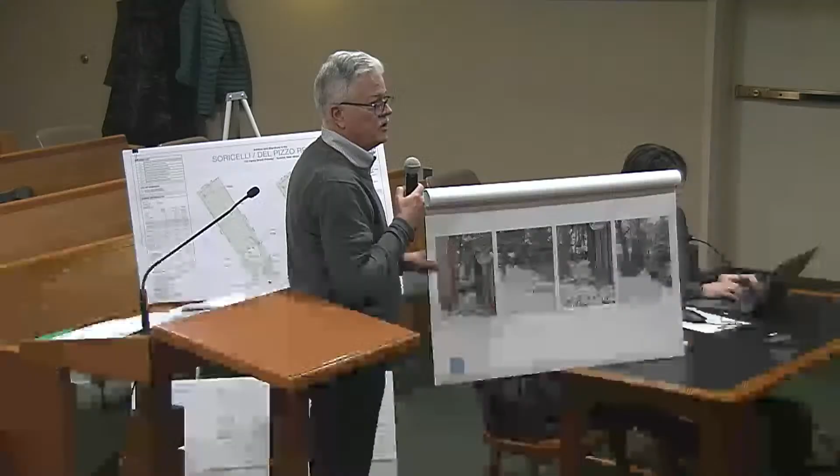There isn't a lot, so it's in that photo on the right. The landscaping between the 2 properties is a couple trees and a couple shrubs. There's more landscaping around the air conditioners than there is between the 2 properties.

I think those pictures were taken when and by whom? Nancy took these. I took them yesterday, and they fairly represent what you're attempting to show. Yes.

We had filed a photograph which shows the boxwoods and also a holly that fairly screen it from the road and from their left neighbor.

Mr. Uko, I thought what she was trying to say was, if you have screening within 10 feet of the unit, then it's screened. I think that's what it says. Yeah, I think she was asking about the nature of the screening, but also maybe her point, wondering whose screening some of that was, could the neighbor remove it.

But really, in reality, those two trees are quite tall and the leaves are high, and they're not screening. Yeah, I wouldn't call them screening. They're mature trees, but I think the intent of screening the unit has been accomplished. Okay, I don't know what else we could do.

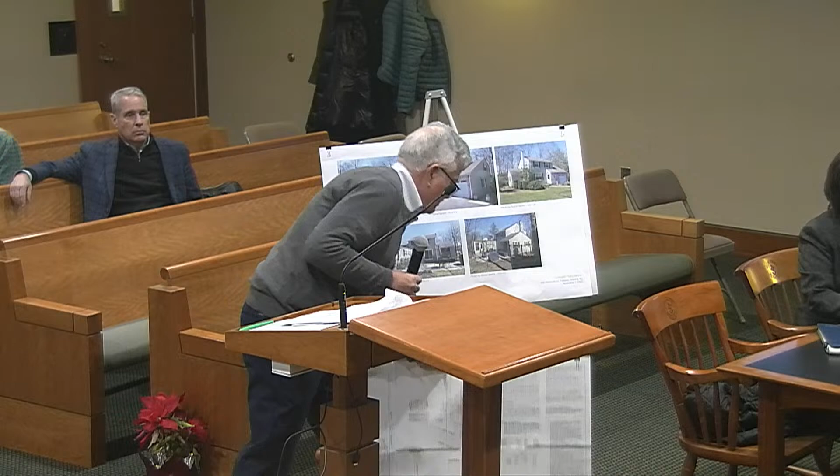November 15, 23. I think Christa's point was that the version we have in front of us tonight, she couldn't find a difference between what we have tonight and the first one she saw, and she was wondering what the revision was. I think that's what her question is. Okay, so it was the labeling. They requested the addition revision, so we made it. My experts are happy on that.

What else? Before we go on, can I just ask a quick question? This goes to what you were just talking about, the revision. Looking at the grading plan in front of me, the right side of the garage where it says proposed addition, should that be hatched in? No, if you're looking at the proposed conditions, it has a crosshatch on it and words next to it. Okay, because there's also an arrow that says proposed addition to like a rectangular box. Is that the addition for the garage? That is correct.

Okay, Marie, let me go to you for your... Can I ask Mr. Kelly? All right, I'll stick with this one for now. I'll just stay here.

Could you talk about that chain link fence in the backyard? It appears that it's going onto another property. I'm going to let Nancy talk about it, but yes, I asked Nancy to take a photo of that. I took pictures of that one too. So we've had a chain link fence for about 20 years. Didn't know it was across the property line until you referenced it. I took a walk out there because I don't recall that ever being an issue. I do know that when we put the fence up, we told the guys putting it up we wanted to make sure our dogs can't get out. So what I think happened, because I took a walk back there, there's a big tree, and then there's a root that goes from that tree, above the ground, to the fence. I think they just followed the edge of the root instead of going on the root. Yeah, so that's what I think happened. I think they went beyond the tree and the root, and that's why the fence encroaches on the neighbor's property.

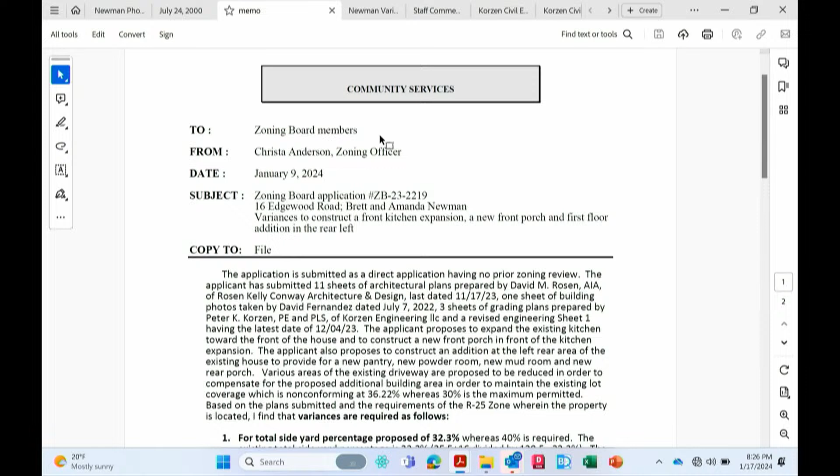Christa Anderson has all of the same things with some interesting history pieces, and she mentioned some other things, particularly lot coverage about circular drives. This property has a circular drive where the width should be 12 feet. We're pulling some of that back, adjusting some of the curbs, and reducing some of that paving area. Although the existing circular drive was presumably installed at the time the house was constructed, the applicant should be encouraged to reduce the width, especially in the area where the existing landscape island is proposed to be removed. And that's what we're doing - we removed that landscape island, since there was so much paving that they just put a circle with some plants there. We've narrowed the driveway and eliminated that.

On building coverage, she indicates that 3.8% is in the garage, and for floor area ratio, 3.75% is in the garage. There are some other notes going back to a resolution from 1999 talking about the use of the carriage house or garage - it is not an apartment. There is a bathroom and some rooms there, but it's not for overnight accommodation. She also mentions at the back of the garage there's an air conditioner for that building, and that it does not meet current requirements.

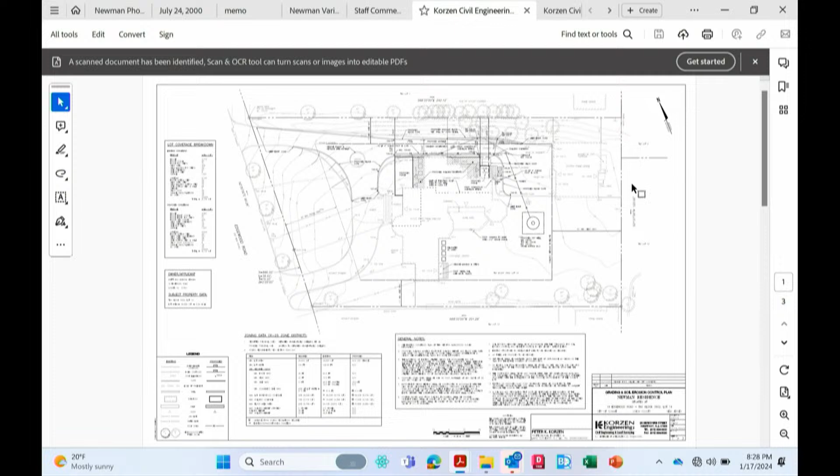This is a hard to see drawing. You want to take a break? I'm going to go get it. Thanks, Todd, we'll take a 2-minute recess. Sorry, George, we'll step on your toes. I don't. We try to stay as informal as I can.

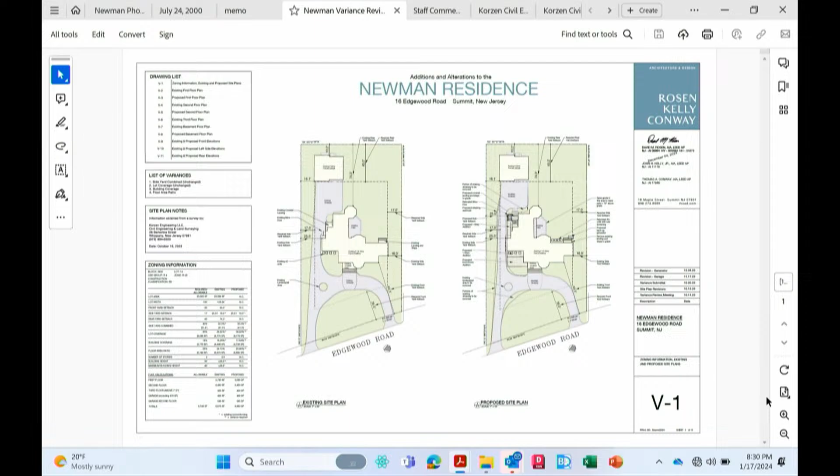Okay, hopefully I'm better with that. Anyway, in the back of the garage there's a pad with an air conditioner. It's closer to the property line than air conditioners are supposed to be. So going back to Christa's comments, that's pretty much all of it. She says that we can acknowledge that as part of this. By acknowledging that, would you like us to add a variance for the air conditioning location? I think that's totally up to you, how you want to handle that administratively. I think we should - we certainly agree if that's what you'd like to do.

On V1, same as what you have. It just shows the area with a hatch here, which is the porch, the area here, which is the extension of the kitchen, and then where the existing house has sort of a sawtooth wall at the back. That gets straightened out, and that's where the mudroom is.

There were other staff comments, in particular the HPC endorses the proposed changes. The new addition is appropriate size, scale, and all materials will match - this is an appropriate addition for the North Side Historic District, no objections. John Linson mentions - I'm not sure where his is - but he said there could be more screening on the left side of the property, I guess so that people in the Fortnightly Club parking lot have a nicer view, but that's of course fine with us.

There was a question among the engineering comments about the height of the curb. We're just sort of straightening out a portion of the driveway, and in doing so we're doing a slightly more substantial curb. It is only 7 inches high - I think that was your question. Yeah, it's not really a wall, but it's referred to on the drawing as that. Sorry.

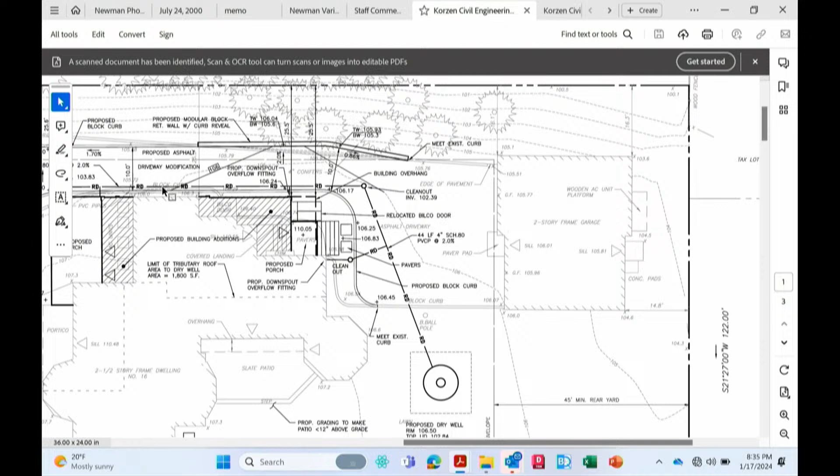What we wanted to do is take the areas—this is the driveway going back to the carriage house, this is the left side of the house. The Fortnightly is up at the top of the screen here. You can see by these contour lines that the runoff would go that way. So we took all the roof water from the left side of the house and directed it in a pipe back to the dry well. The purpose is to make sure that the more exposed side of the house, the area where it would naturally run off, is the part that's being contained.

Does that answer your question? Yes. Okay, Marie, as long as we're on you, why don't you pick up the rest, anything else you have? I do, yeah—I think he's going to talk about the next one. I wanted to ask him something about that.

So I've looked over the calculations for the dry wells. I don't take any issue with it. That's fine. He's going to put a locking cover on top, which makes it good for inspections and regular maintenance. I think those are all adequate.

So item 13, there is a slate patio in the back of the house. Let me see if I can get a better drawing showing that. So this, in gray, is that patio.

I think that when it was built—and this addresses one of Christa's comments about why some numbers may be different from 25 years ago to today—I don't know the specifics, but this patio's threshold is 12 inches, and the patio may be 13 inches above the ground. I think the ground may have just subsided a bit, gotten more compact. We didn't change it.

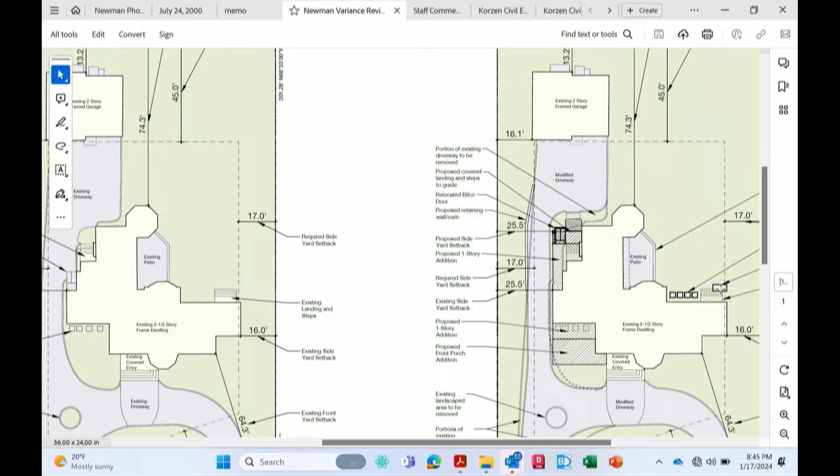I have no idea when the air conditioning went in there. It's long before Brett and Amanda bought this property. It's supposed to be right next to the building that it's serving, and the garage is supposed to be back there. But the garage is non-conforming in a number of ways. We're not doing anything with this.

Is that screened, though? I know there's a fence around part of the property - do the neighbors see that air conditioning? There was talk about just granting a variance for that, sort of grandfathering it in, but all of the questions that apply to location for any other air conditioning unit should apply to that one.

Is it screened? Does it impact the neighbors? That area is screened, the border has substantial landscaping, but we're also happy to add more if needed. I'm not sure there's room for more, because there are mature trees that run along there already - but I can barely see our neighbors now with the leaves gone on the trees.

So can that be a condition? Yes, we can make that a condition to landscape and make sure that's agreeable. We'd rather not change the location of it, so it'd be good to document that as an existing condition that will continue. But any landscaping required around that, we'll be glad to have as a condition of approval.

And speaking of conditions, I have a question for our attorney. We have the resolution from 1998 that clearly says the carriage house shall not be used for residence. We've heard the applicant, or the architect, saying we're not going to use it as a residence. Should we add that as a condition again now? Do we need to do that just to restate it, put it on the record?

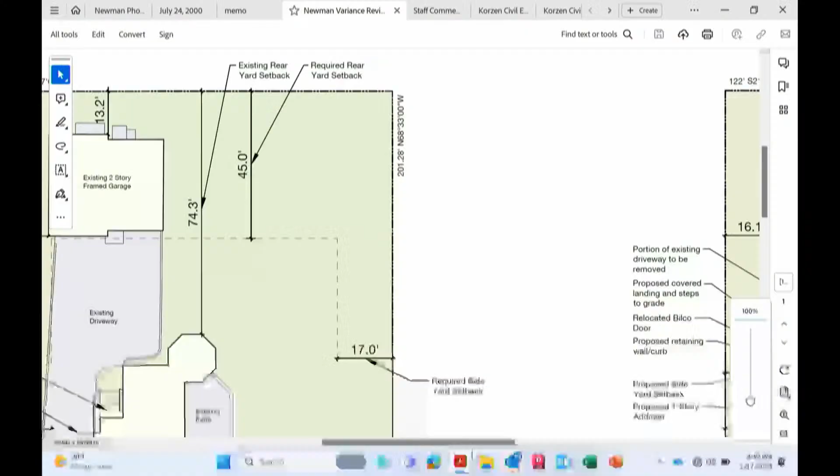I think Krista had mentioned something about either a permit for a generator having been granted or something. It's back here in the back right. And it's positioned there with the appropriate distance between the generator and the air conditioning units and the generator and the house, and it's conforming with regard to that side yard.

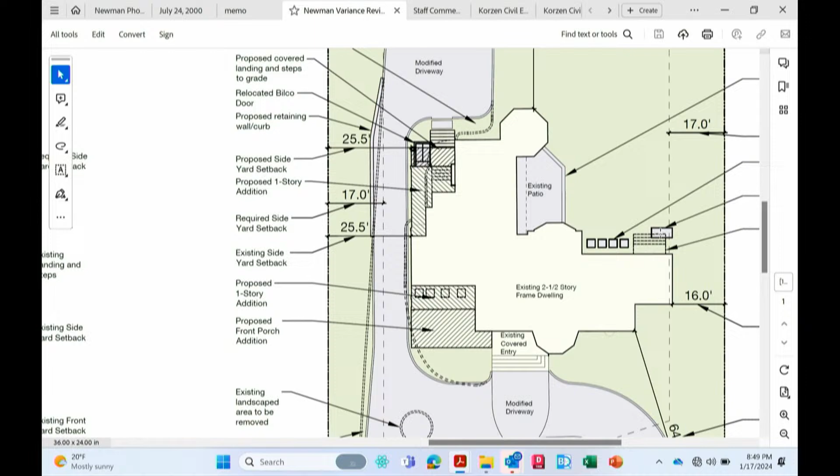What page is that on the plan? This should be V1, but there was a revision that was done, and we submitted that.

Sorry, give me a second here. So the version you may have was November 17, and this one is dated December 4th. Yeah, that's why I couldn't find the older version.

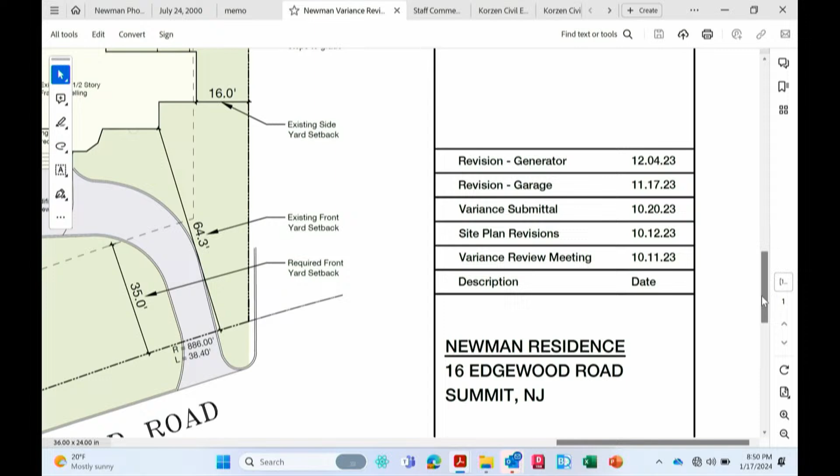And that's all conforming and everything? There were stairs there? The stairs are gone, they will be removed. Okay, I see that now. And the door that's there will be removed. Okay.

More questions from the board? Okay, at this point, I will open it to the public. Are there any members of the public here that wish to ask a question of the architect?

Seeing none. Last chance for the board. Any other comments that you would like to make at this point?

I think we're good. We just want to thank you for the time. As said earlier, we're just trying to make this a home that our family can continue to enjoy for years to come. Our children are still young, so.

Okay, then I will one more time open it up to the public, this time for any comments, pro or negative, whatever comments you wish to make on this application. Seeing none, we will move to executive session after conditions and vote totals.

So the vote total for this application is 5 votes as a D4 variance. The conditions are as follows: 1, compliance with the conditions enumerated in the board engineer's memorandum. 2, construction of a stormwater management dry well system sufficient to capture 1,800 square feet of roof runoff.

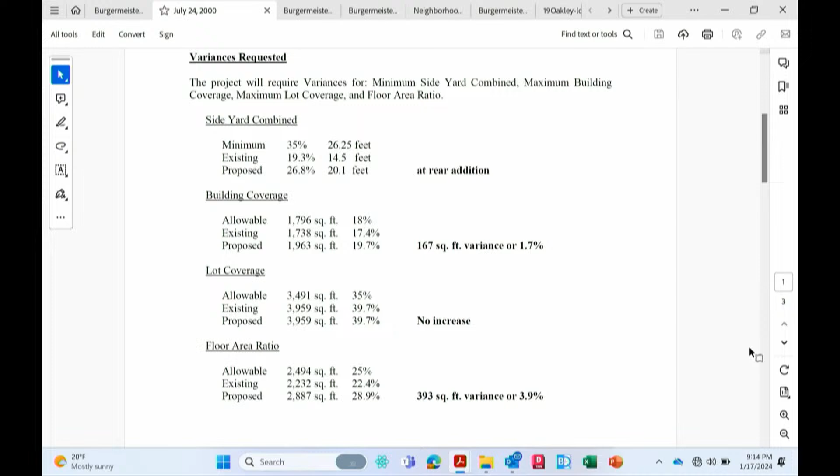Looking at the project narrative which I described, we need 3 variances. There are 4 listed here because I wanted to make sure Krista Anderson got a view of the combined side yard. Right now the house is wider, and she mentions the side yards are not compliant with the current ordinance, but with some history she's put into her recent reviews, she noted that back when it was built, it was supposed to have combined side yards of 15 feet.

The existing is 14 and a half. There was some question about what the numbers are at the addition. It's actually at the addition in the back, because we're no longer dealing with the garage on one side and the enclosed porch on the right side. 35% is required, and 26.8 is what we're providing.

So there isn't a variance for combined side yard. The question for Krista was whether there's a tiny sliver that might count depending on exactly where she drew the line. She decided that we did not need the combined side yard variance.

Building coverage allowable is 18. It's currently just under that, and we're going over by 1.7%. The building coverage increase is because of the first floor of the proposed addition.

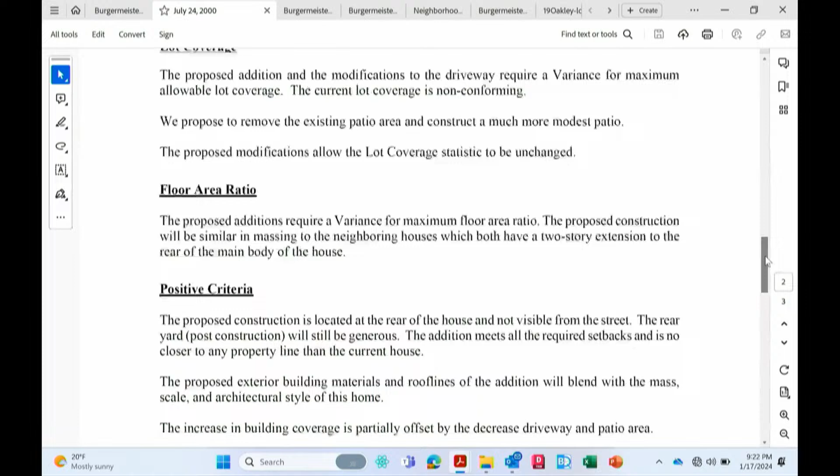In terms of some of the criteria, one of the main ones often cited is promotion of a desirable visual environment. That just means it looks nice, and I think this one does. It's really unusually screened. Nobody in any of the houses on Fairview could see this because of the height of that big hedge.

And on the two sides, there are hedges, but they're not great. If we need to either replace something, or if something gets damaged in construction by somebody backing into it, then we could have as a condition of approval that the hedge is maintained, and we can talk more specifically about requirements, whether it's arborvitae, so it's year-round and that kind of thing.

So extraordinarily well-screened, and no neighbors directly across the street. On the negative side, there isn't anything that would cause this to damage the perception of the neighborhood, or to come close to substantial detriment of the public good.

So that's that part. Now let me just go through Krista's comments, which are all pretty much the same. Moving through some of the other comments, I'll get to the engineering in a moment, but there really wasn't much more other than John Linson's comments that the proposed improvements are well screened with landscaping, no objection, and then the comment by the Historic Preservation Commission: the proposed addition is of appropriate scale and matches the existing structure, and is also confined to the rear of the house, no objections.

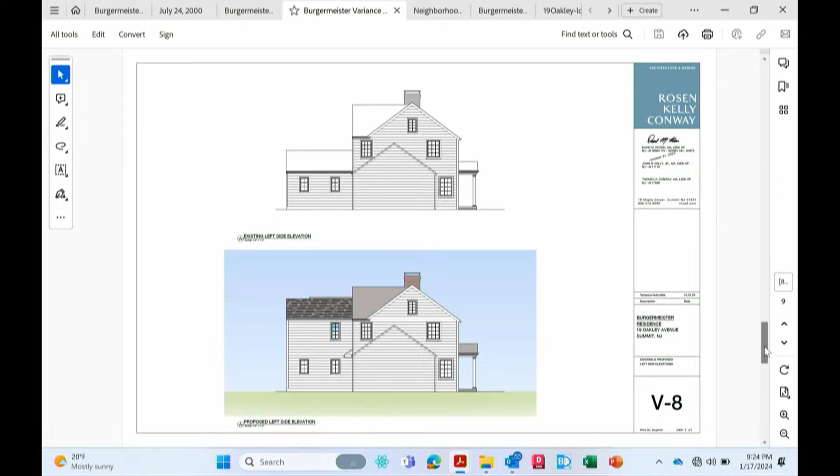The drawings before and after, the only difference is that I put some color on, but I just want to go back and show some of the other views. This is on the driveway side, and you can see in the upper left of the existing, this is where the addition would be. This is that addition. It's directly over the kitchen. And then just looking at the back of the house.

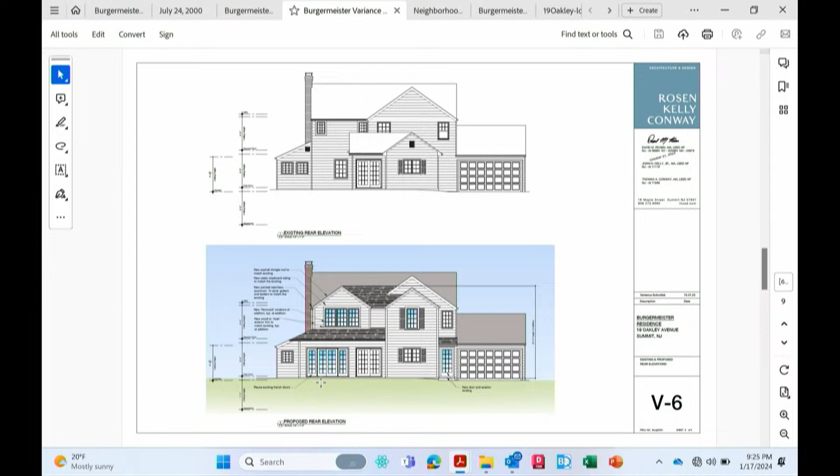Looking at the back of the house, the existing kitchen is this peak, this part in here, and we've just raised that up to two stories. Then there's a slight recess, and then the bedroom, the new bedroom we're adding, is back here. These doors are going to be relocated. They currently face toward the side, toward the neighbor to the right, and we're repositioning them around to the back so the connection is better that way, providing a little more privacy.

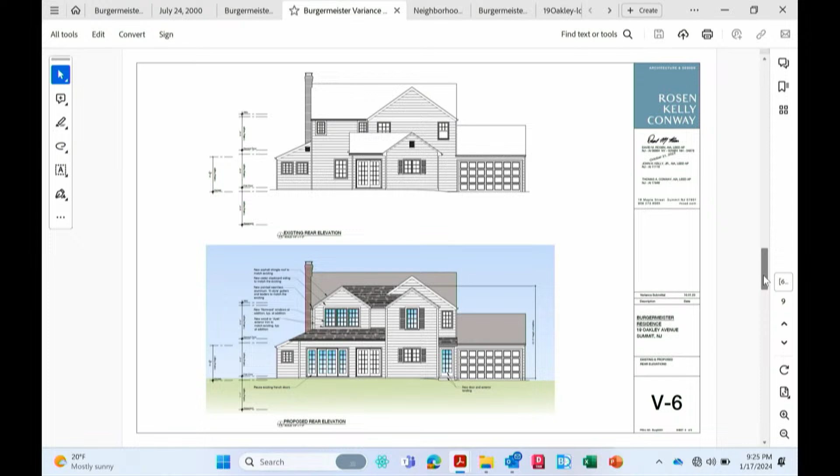One or two other minor things: we're adding a door so you can get from the driveway directly into the mudroom rather than having to go through the garage. On the floor plan, let me just go to the first floor.

So the first floor has an addition in the back with kitchen and a breakfast area, and the area with this rectangle is the new space. We call it a family room, but it's all sort of one room in the back, and instead of a window in the back of the living room, there are doors to get the flow to be nice.

On the second floor, in the area approximately where this blue rectangle is, that's about where the addition is going, and more specifically it's back here: the closet and bathroom, and about two-thirds or three-quarters of the new bedroom. The line out here is the extent of the first floor. This part is the same, but then we come way in from there in order to pull that back a little bit.

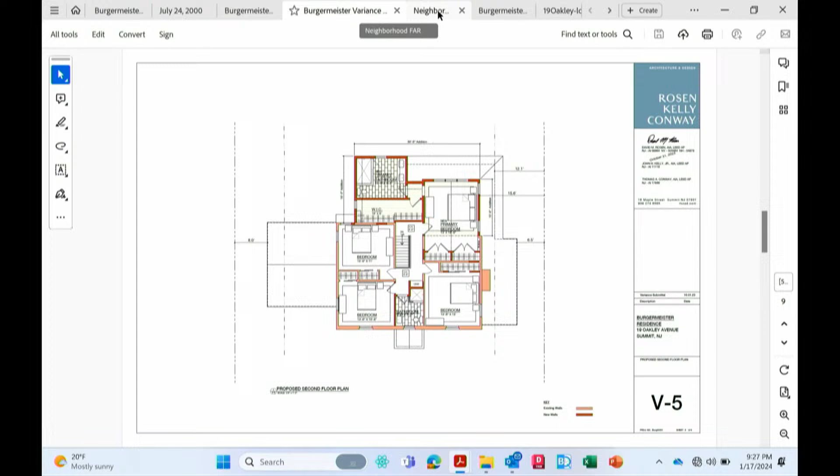Because of the floor area ratio, we got information. This is just a diagram similar to that Google view. It shows the houses, just the outlines, and we got the information from the Summit Tax Department, the tax assessor's office, to see what the other houses are.

I don't know whether, Stephanie, was this entered into evidence? No, I think this will be an exhibit. Yes, please. And what this has is this same diagram and then the tax assessor's information, which gives the square footage of the property.

Since these properties are all exactly 10,000 square feet, the arithmetic is quite easy. But it shows, I thought it was quite helpful to see how big the other houses are.

What we find is that Stephen and Solange's house currently is 22.4% floor area ratio and is going to 28.8. The house to the right is 23%. The next one to the right is 28.1, very similar to what our proposal is.

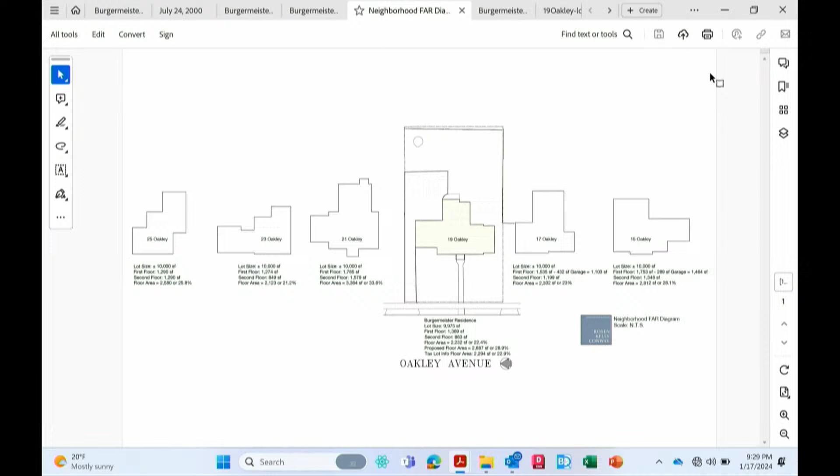We already covered some of this. I know these engineering drawings are illegible, but I'm going to come in closer on this so you can get a sense of it.

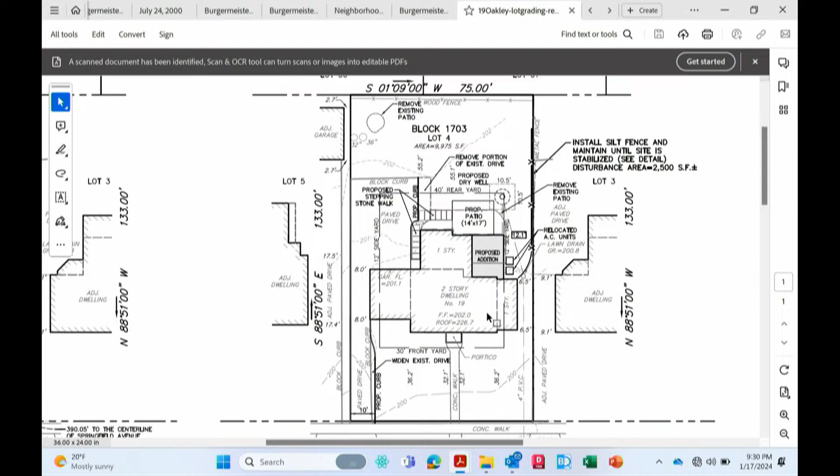The area of the addition is shown here, and the proposal is to take all of the roof water that comes off from the main ridge back and put it in a new dry well in the backyard. We can determine exactly where that goes, but it's more convenient to put it there.

There's also an existing gutter at the front of the garage that goes out to the street, and there's a little drain in the lawn along the right side of the house that goes out to the street as well. The one on the garage will stay. The other one we're taking out, but we could connect it. The intention is to put all of that into the dry well.

Again, we're not required to have any, but we're picking up 1,000 square feet.

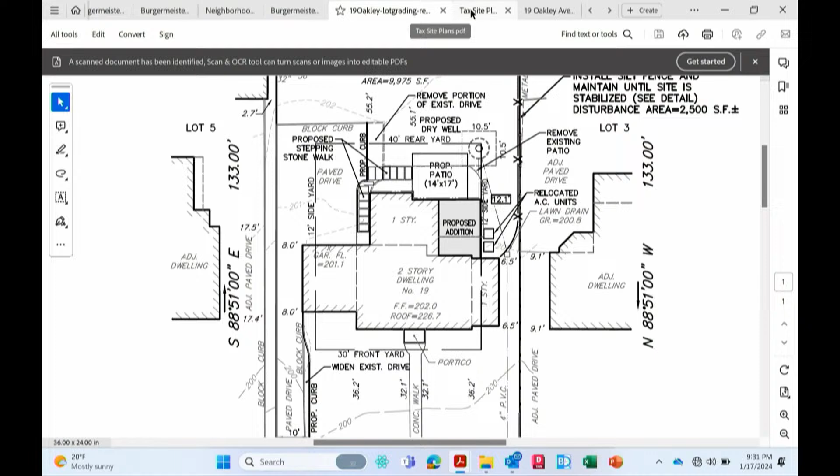Just for the prior thing I was showing, this is an example of what the tax office has. It just has a diagram, and it's again hard to see, but it has the dimensions on each of these. This runs through those various houses, the 6, and indicates on the left side some of the information, and then the square footages and the floor area ratio can be determined.

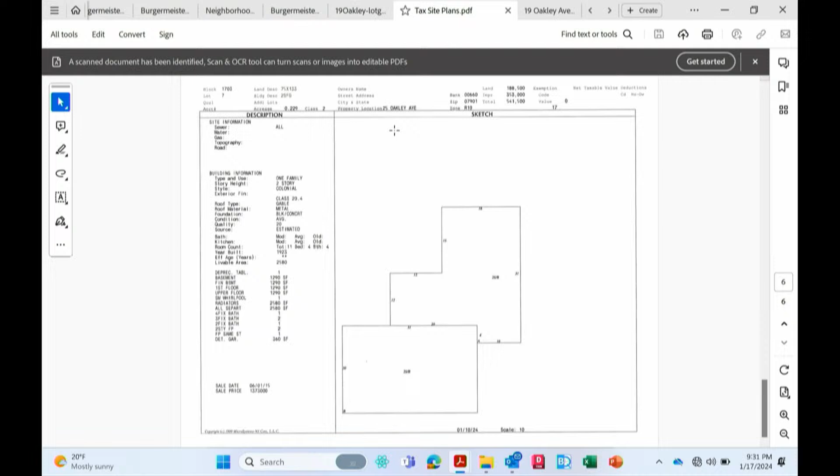In this case, it seems pretty accurate. The number they have for Stephen and Solange's house is pretty similar, not exactly the same, but close to what we had calculated. Anyway, so that's the presentation, and I'll be glad to answer any questions.

I have a question about the lot. First, we normally start with our professionals. Okay, do we need to identify this as an exhibit, since it was submitted just a few days ago?

So did the board even get to see this engineering drawing? No. I did email it. Okay, but I didn't print it because I wouldn't be able to print it to scale, it wouldn't be readable, so that's why.

So that is then what, that would be A2? A2, I need my microscope to read it. So the only difference on that submitted new lot grading plan was the stormwater management system, was on there, yes.

Right? The calculations are in there. There is a detail that shows the size and the layout.

It's just a 6-foot diameter perforated concrete tank, 3 feet tall, and it goes in—they dig a hole, put a soil fabric in, there's a couple feet of gravel below, a couple feet on the sides, and it has all of the components you've mentioned, with the lockable cap on the top.